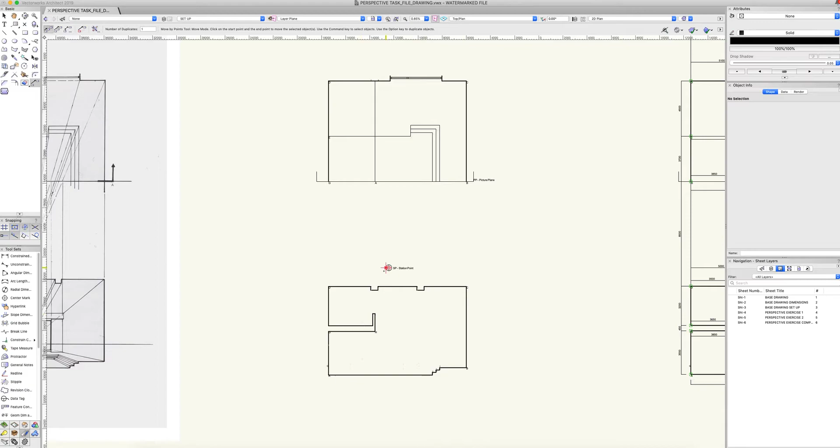We'll start with a basic plan at the top, and a section, which is your picture plane. This section is a scaled cut through your plan at this point. Every perspective, as we've discussed, has a station point - this is the point at which your viewer is standing, looking into the room. So all points will come back to the station point.

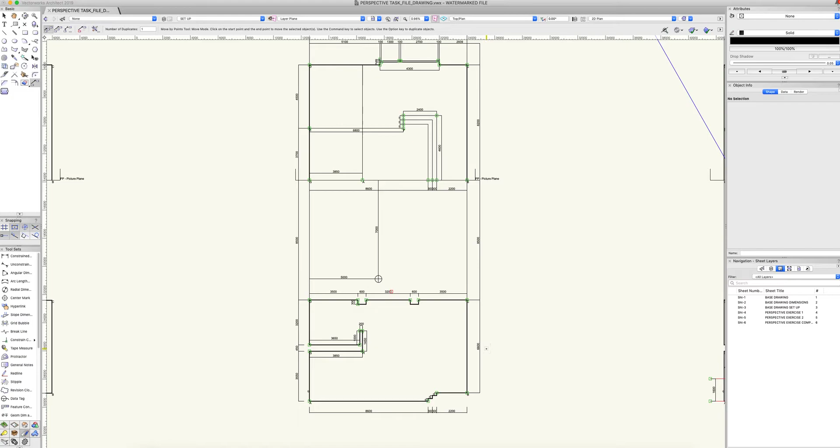What I've got here is a dimension drawing. For those drawing this by hand, we issue this, which shows every dimension you need. These are shown in millimeters - 8,500 millimeters, 6,600 here - but the drawing at A4 will be 1 to 100. So knowing that, all you need to do is draw this line at 6.6 centimeters, and this line at 8.5 centimeters. All this will become clear.

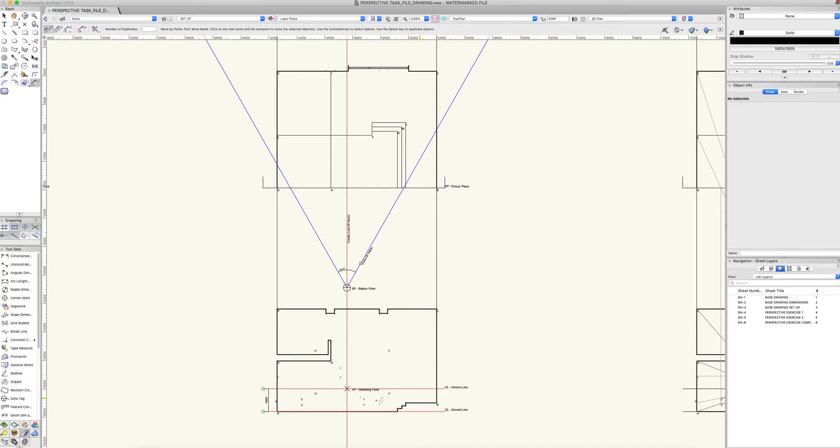This is just a little preview of what we're going to be doing. So we'll start off setting up our drawing. I'll run through this step by step, where we look at our cone of vision, which we've discussed, at 60 degrees. We've got a centre line which cuts through both drawings and is a line taken from the station point. Then on the section we'll have a ground line and a horizon line, and the horizon line is your chosen eye height, typically around 1600 millimeters, so 1.6 metres.

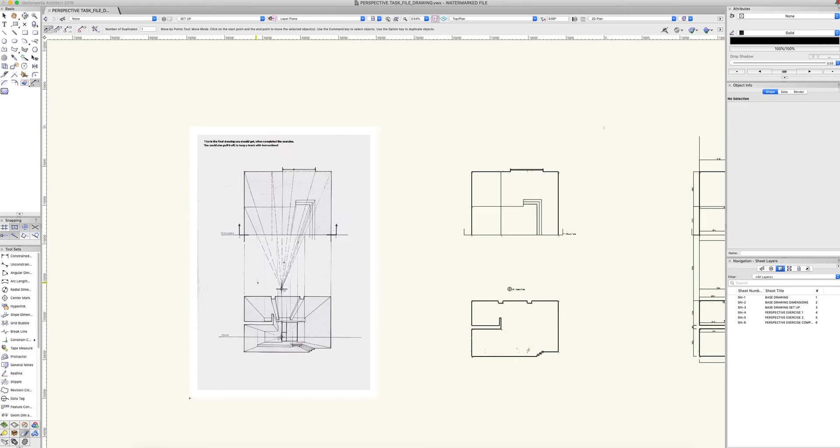And then we start to work up the perspective, which we'll run through step by step, so don't be scared by this drawing here. Then another section of that, and this ends up with a clear drawing, which we've shown here. So I'll rattle through this. We've got a step-by-step guide which accompanies this, but what I'll do is start drawing this in Vectorworks - as said, this can be done on a piece of paper with pen and pencil, just so you know this is just a tool that we can use.

So we'll be using the selection tool and the line tool mainly for this presentation and exercise. Before we start, we've provided the plan and section as discussed, and we've indicated the station point as to where it needs to be. Now, in order to work up the section, we need to understand where our vanishing point is and work from there. So what we need to do is draw a centre line from our station point, which can run both through the plan above and through the section.

We know that we need a ground line, and this is the bottom of our section cut here. So we take our line through here and treat this very much like you would a draft line on a piece of paper - just treat it quite roughly. We can always tidy the drawing up at the end, but make sure that you note things as you go.

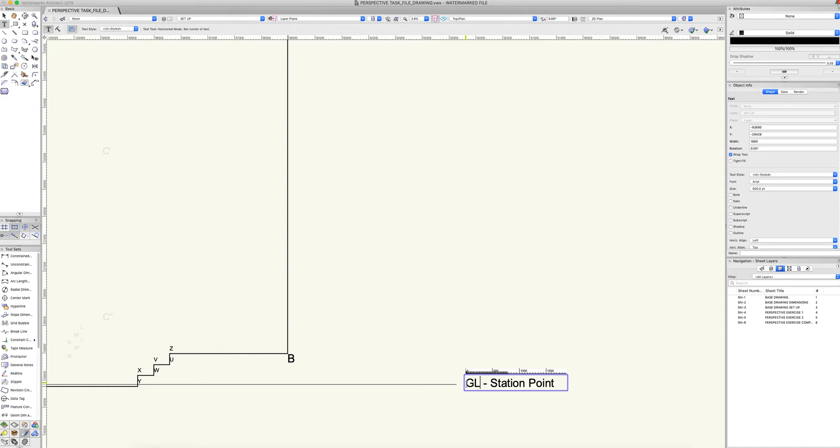So we know that if we just copy this here - Command C, Command V for copy and paste, if you didn't know - this is our GL, our ground line, which is at the base of the drawing. And just so we're clear, we can ensure that we line this through, as this is our centre line, which comes up from our station point.

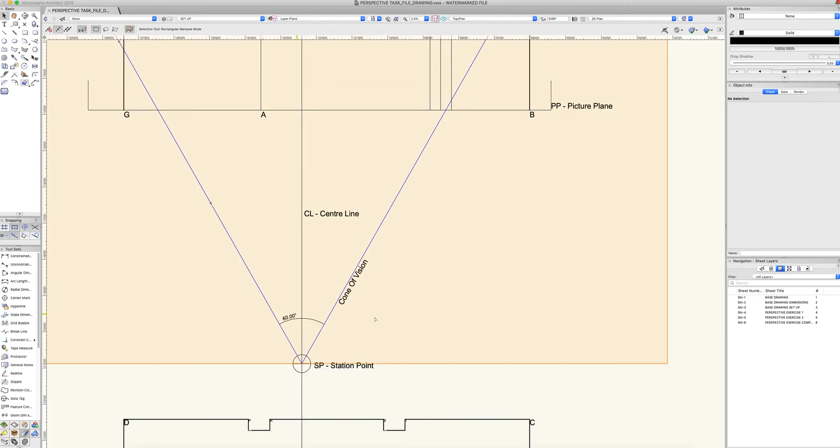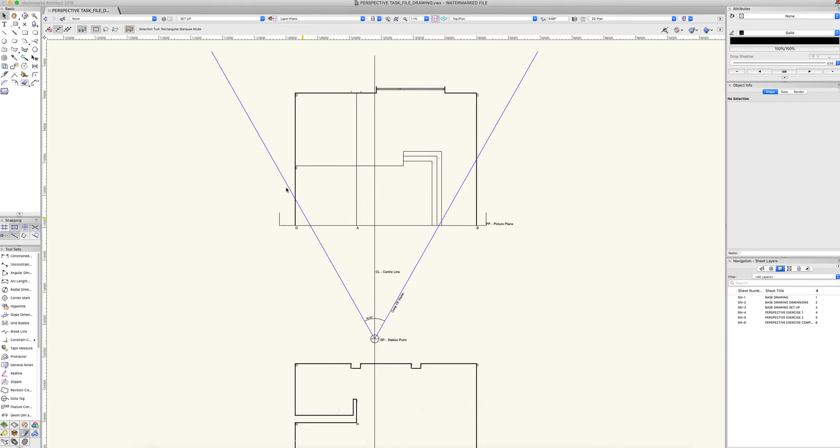We've touched upon the cone of vision, shown here as the 60 degrees. This shows the area you're going to capture. Everything within the two blue lines will be shown without distortion. Anything beyond that, if we widen these, things start to distort. But if we work on the principle that we've got a 60 degree cone of vision, anything within that we know is going to be proportionate and not distorted, which is a good thing to go off.

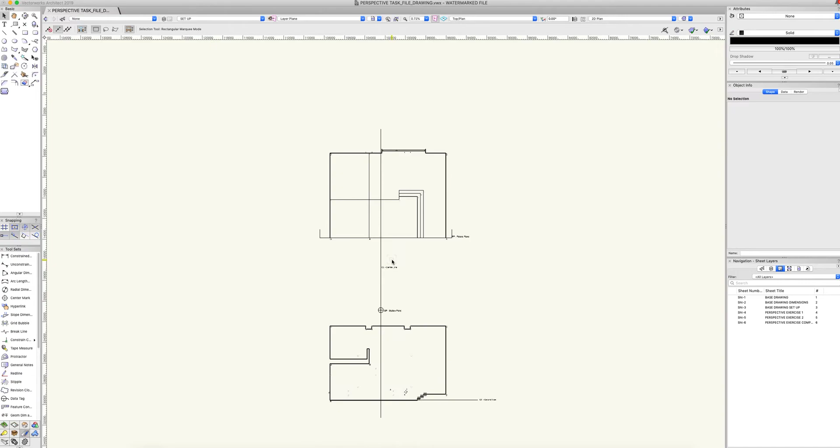It's always key to understand where this is, because you could locate it at various different points and work from that. I'll lose that for now since it might be confusing, but there are going to be PDFs broken down individually so you'll be able to see the cone of vision, the horizon line, the ground line, and everything set up. This is just a little walkthrough.

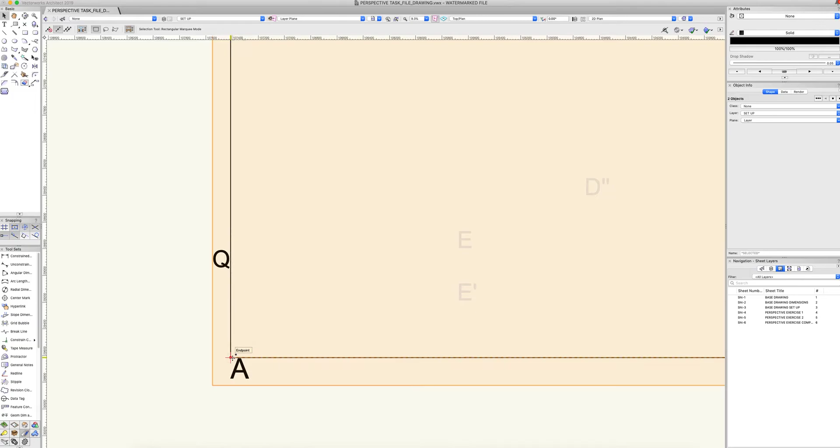Now we've got our ground line, we need to set our horizon line, which is our eye height, and as discussed before, this is going to be 1600, 1.6 meters off the floor. To do that, we can draw a line from the ground line at 1600, so you know what height that is. Then, if we wish, we can copy this line up, using the move by points tool. Create a copy, make this box here, move that up, and then we call this one the horizon line. This is a key line on the drawing.

Now we've got our horizon line and our centre line. Where this crosses at this point on your section, this becomes your vanishing point. We can show that, again it's good to annotate where these two points meet. We know this is a critical part of any perspective, particularly one point perspective. This is our vanishing point, so all lines, as discussed, converge to this point.

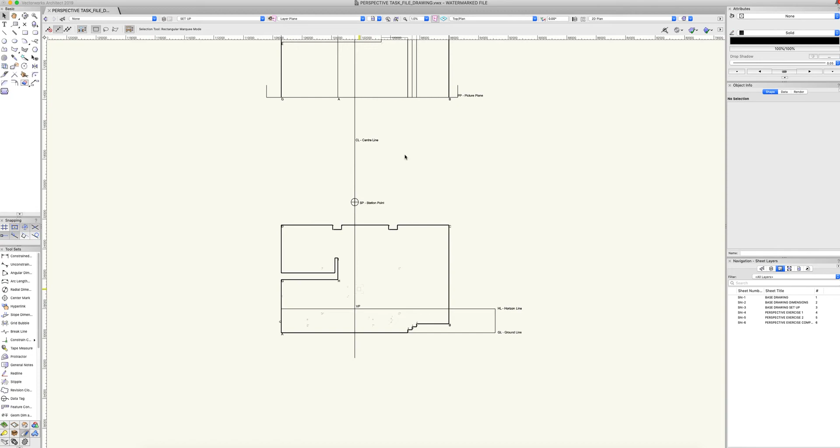In the section, we can start to draw the perspective view of the space. First we'll draw the main outlines of the room itself, then we'll go up into the plan, locate the rear corners of the room to identify heights, which we will then translate into the section below.

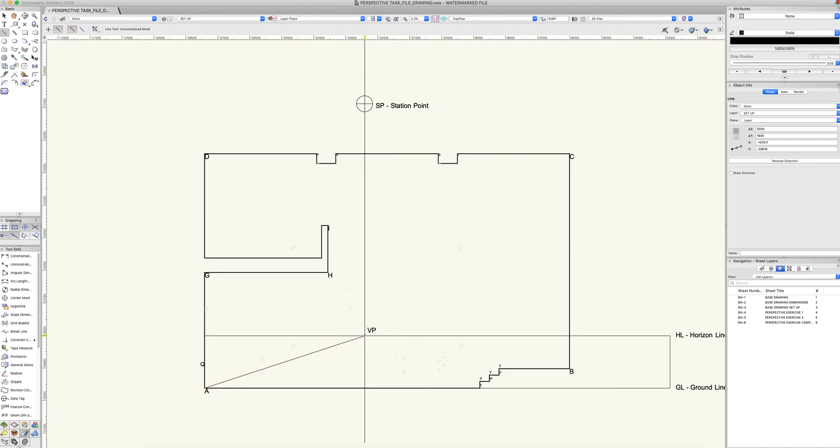First, in the section view, we'll connect the VP, our vanishing point, to point A. Then we'll do the same again using our line tool, to point B. Repeat the process to C and to D. From this point, we now have the 4 corners of the room moving away from us, back toward the vanishing point.

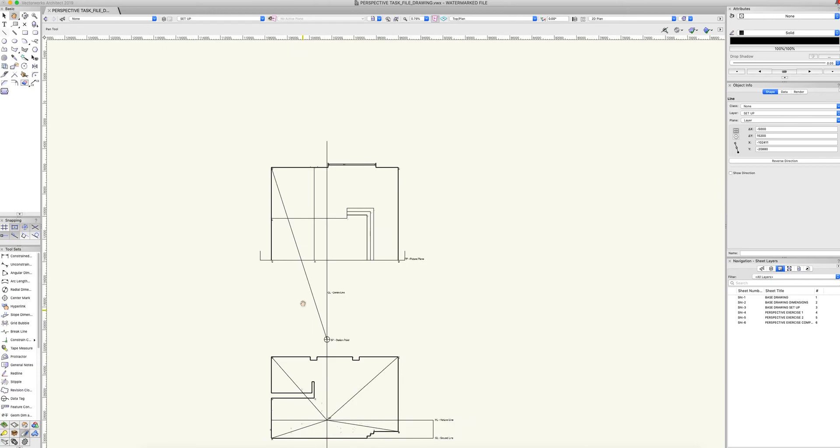Now if we jump back up into plan, we can locate the top left corner of the room. If we look at D, for example, this is where our station point comes in handy. We take a point from the top left corner, D, to our station point, and where it cuts the picture plane, this is key. We pick up the line where it cuts the picture plane, draw a line down to our section, and then where this cuts line D, so VP and D, this is now going to be our D1. Label that - I've got this ghosted out here, but we'll label that D1.

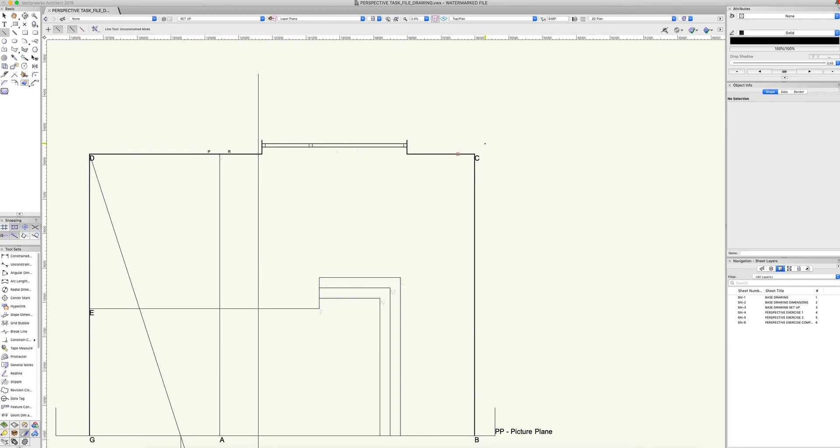We can repeat this process for C. We know our point C, which is our top right corner, take this to the station point, where this cuts the picture plane, draw a line down, and then where this cuts the line VP to C - this corner of the room here - we can label that C1, or C.

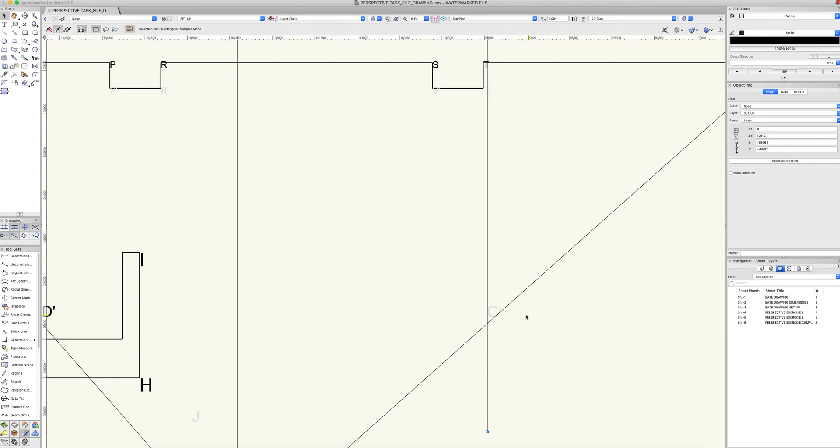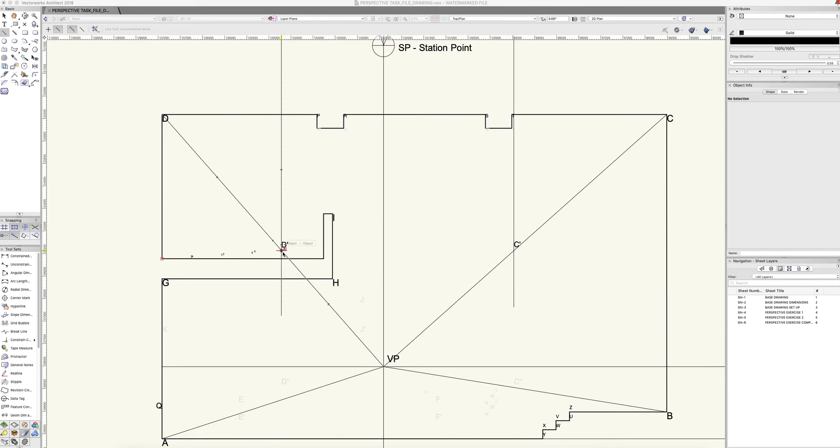D1 and C1 are now in our section, the top two corners of the room step back. We know that in 1 point perspective there's a horizontal plane, so most lines should be horizontal or vertical, with angles showing the perspective. We can join these two together, making sure you get point D1 and C1, and that will give you the top of the rear wall.

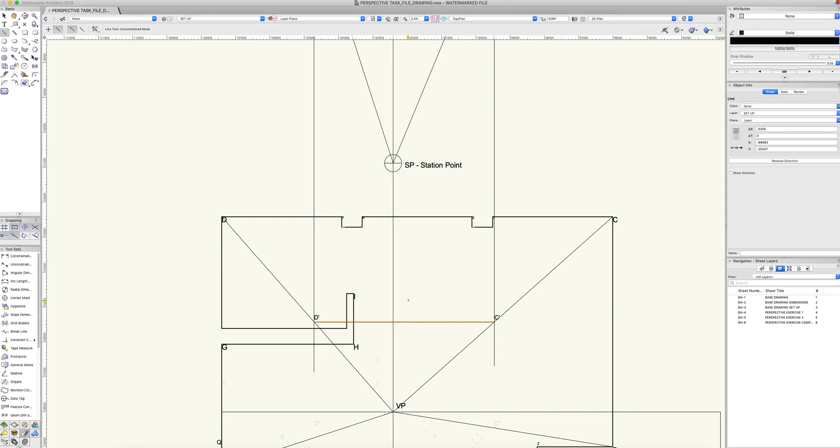It's also good to note that we went through the exercise of locating corner C by cutting through the picture plane and drawing a line down. But once you're more familiar with 1 point perspective, you could cut a few corners, knowing that once you've got point D and know the room is square, you can just draw that line across to give you C1.

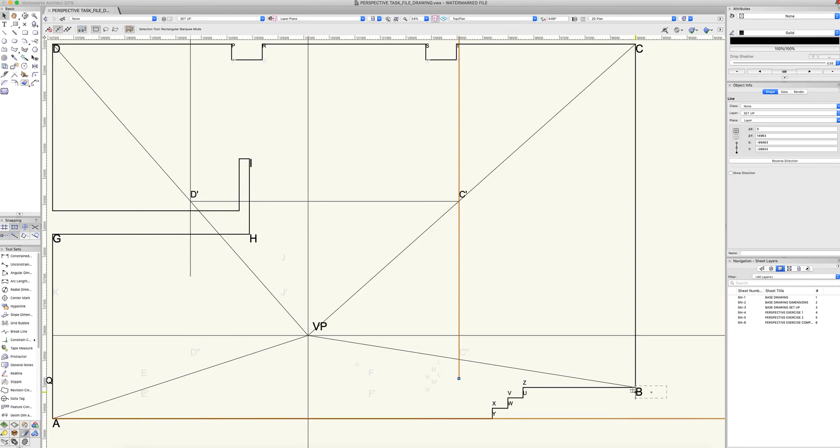Similarly, we know this is the rear corner of the room, and if we bring this line down and keep it vertical, we know that where VP and B intersect, that's the back corner of the room on the floor. Where that line cuts that point, we know it's the base of this wall, so we can label that C2, as we've got here.

Before we locate the bottom left corner of the room, we need to understand the height of the platform and how that impacts it. In section view, we draw a faint horizontal line at the top of the platform, a line passing through B and Z, as shown here. Where that crosses the wall, where it intersects with this wall, that is point Q, giving an indication of the height of the platform on the left-hand side of the room.

Simply, we draw that line across. Much like we did with the other corners of the room, B, C and D, we connect Q back to our vanishing point. This line now gives an indication of the platform height along the rear wall.

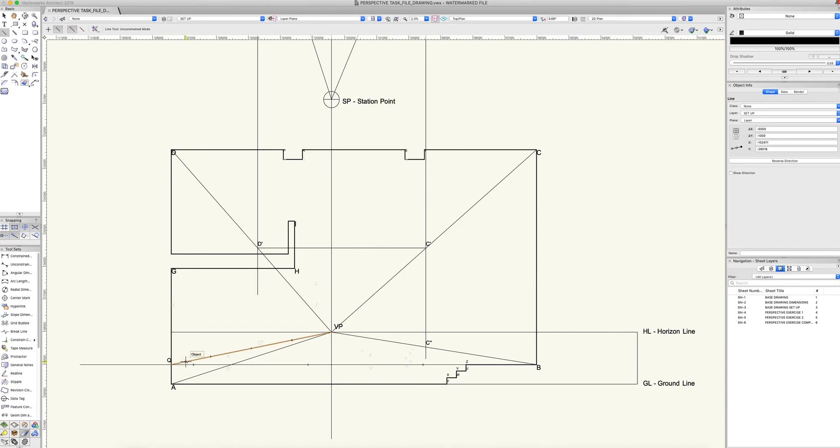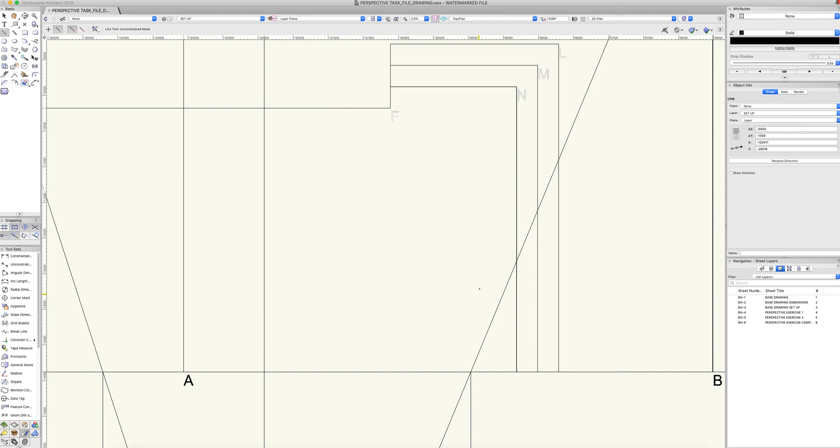We need to do the same again for the plan to understand where this hits the section. On plan, you can see this line indicates the beginning of a platform, and where we've got these steps. This is called the rise, so we've got 1, 2, 3 rises here, which relate to the steps in section. Point E is where the platform connects with the wall.

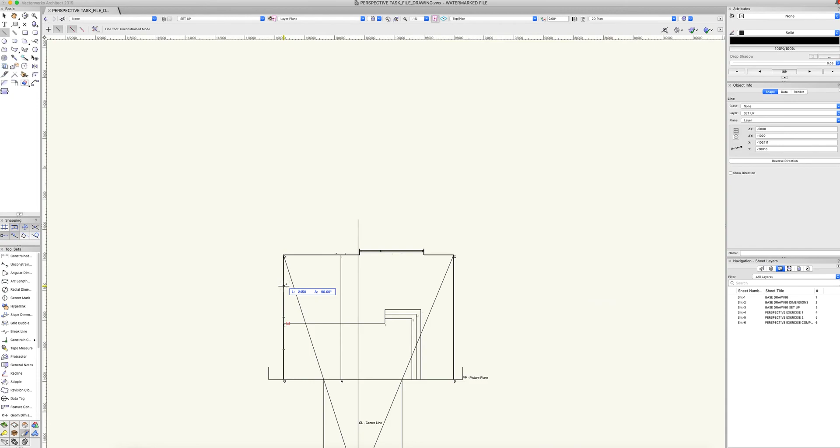Much like how we found point D, the top left corner, we do the same for E. From point E, where the platform connects with the wall, we draw a line back to our station point, and like before, we draw a line down from where the picture plane is cut through the drawing. Where this line intersects AVP and QVP, this is the corner of our platform.

We can label that E, which is the top, and we'll bring that forward, and we've also got E1 at the base. Now we know this, again like we did with D1 and C1, knowing that planes run horizontally—if this is the rear of the room, the top rear of the room—we know this is the top of our platform at E, so we can draw a line horizontally from this point.

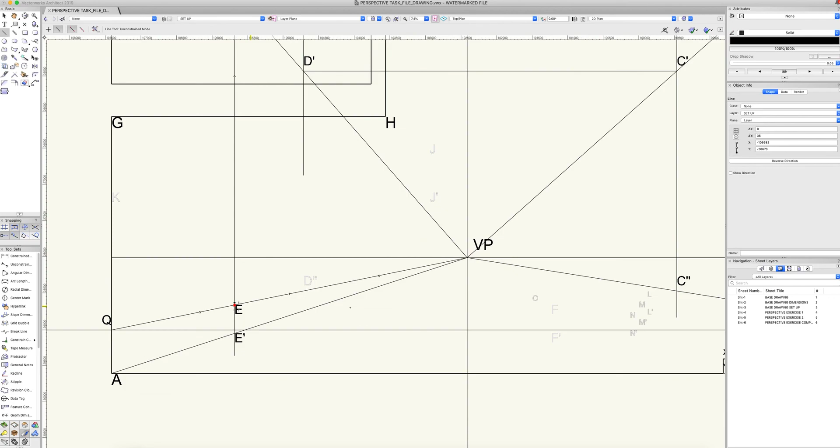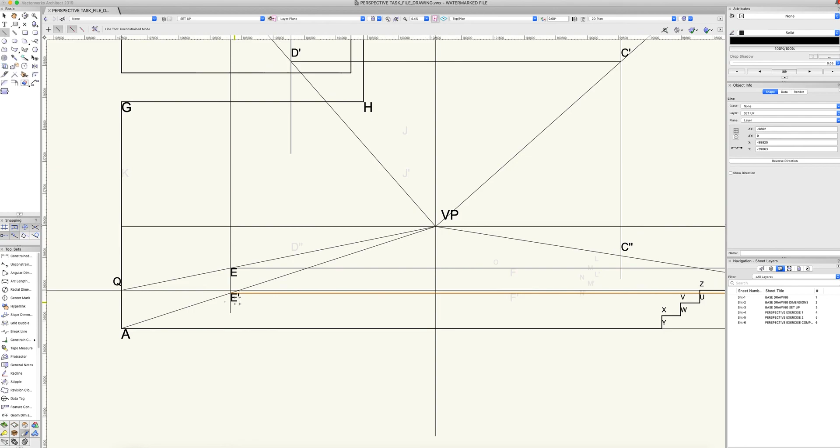We can draw a line through, and at the base we draw a line through, so we know this is the top and bottom of the stage. Then we will move forward and work out where this stage and the steps meet.

For the stage front end, we'll do the same process as we did for finding E, where we locate that point on the plan—that is point F, shown here. We will draw a line from that point.